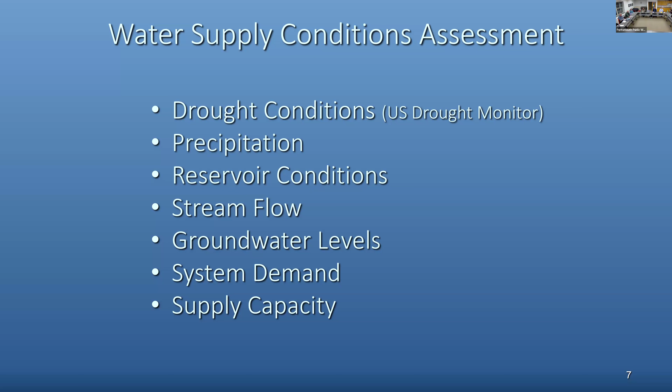We used to incorporate this matrix in our water supply update. It's kind of confusing, so we don't do it anymore, but we are considering all of these factors as sort of a lead up to deciding whether we need to put water use restrictions on based on conditions. So we're monitoring these things, and as all these factors get worse, it may trigger that now we need to put water use restrictions on. Each of the factors, I'll walk through these, we have different categories. Some of them are statistically based, looking at history, where our current levels are, to give them that ranking.

I just wanted to show this graphic. Ultimately, what we end up doing is decide whether we need to put water restrictions on or not. Going through this process routinely, we can start with voluntary restrictions, which isn't usually very effective, but at least it's a red flag to let people know things are getting worse. And then that goes into odd/even watering days, what side of the street you live on, can you water or not, to less frequent watering, to ultimately, like we had in 2016, no outdoor watering.

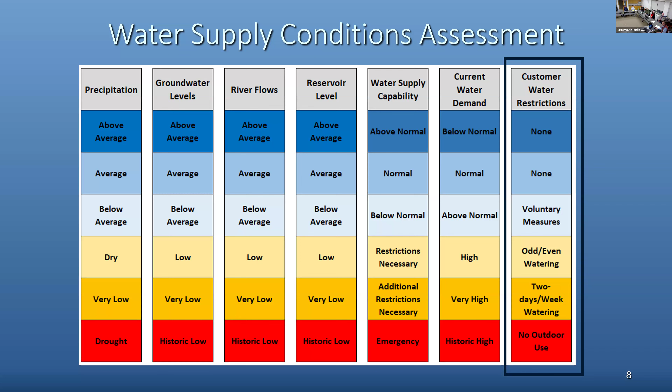So starting with the US Drought Monitor that comes out every Thursday, this is the latest one for the whole country. It's put together by the National Drought Mitigation Center out of Nebraska. They work with NOAA, USDA, and Department of Commerce to put together these maps, and they're looking at similar factors that we use when looking at our conditions. They add some other things like soil moisture and vegetation stress that we don't use. But currently there's a lot of drought across the country, especially Massachusetts is still in extreme drought. This is December 3rd data.

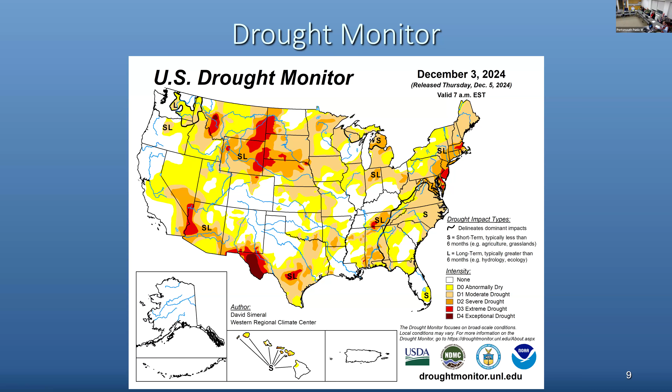This is the current condition in New Hampshire. We are in extreme drought still in this area, moderate drought everywhere else, even with the rain that we received last year. That's primarily one of the factors weighing on this a lot, groundwater levels. Since we were dry for so long, groundwater levels are generally lower, and that's a factor that goes into this consideration.

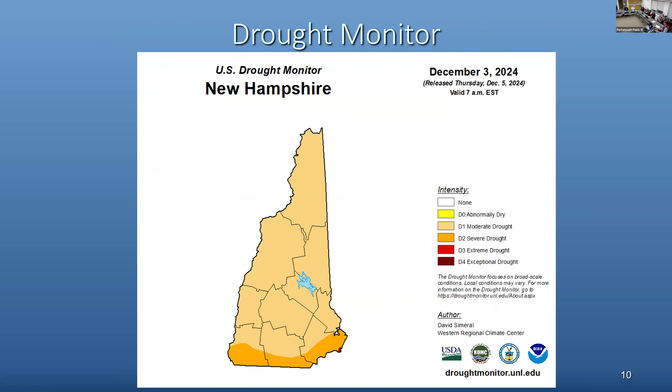So we're now at 83% of the annual average, that's 17% below normal this time of year. I did a quick check, in 2016 this time of year, right before it rained, that extreme drought period, we were 25% below normal, just for reference on how bad we are.

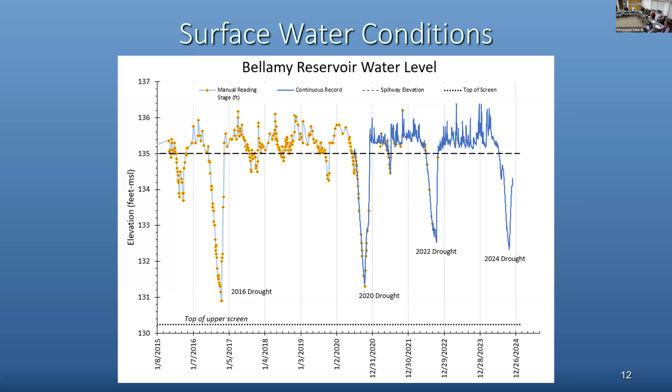Stream flow is an indicator of how much recharge is actually making it to the surface water. We use the gauge in Oyster River since that's a USGS gauged station. It's very similar to the Bellamy Reservoir since they're similar, different sizes, but similar development and general quality.

Groundwater level, it's interesting to see. All of our groundwater levels that I have here, we have transducers in all of our supply wells, so we know what the water levels are in all of our supplies at all times. You pull up on the screen, we have this data.

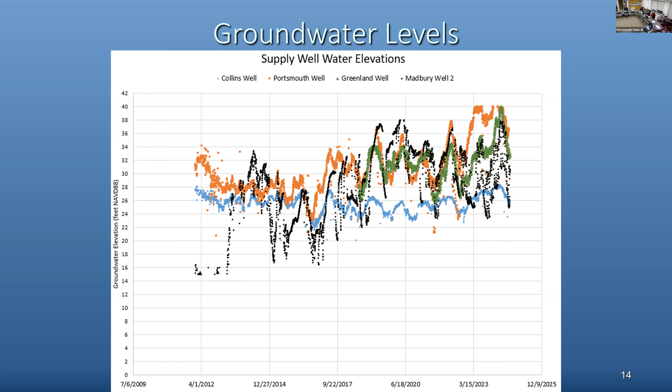Here's just another snapshot of our groundwater levels. This is flipped upside down, so it's depth below the measuring point of each of the wells. This looks at each of the wells. Our Pease wells over here are near average.

The orange lines are 2024 data, October 2024 data. The blue lines are the 9-year averages. So it's pretty close with the Pease wells. Portsmouth and Collins wells are actually higher this year than they have been over the past 9 years at this time. Our Madbury wells, we've been using them quite a bit, so those water levels are a little bit lower than others.

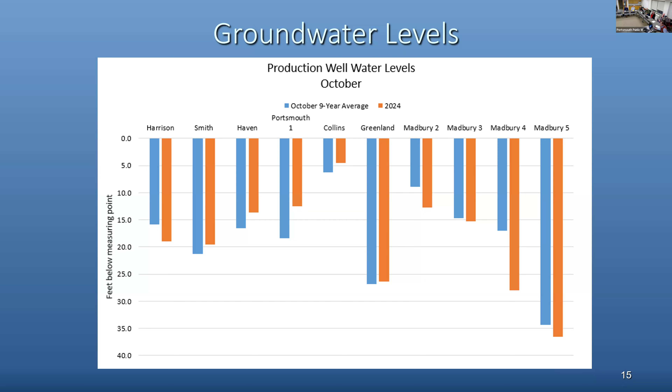That's the natural system, the precipitation, the stream flow, all that side of things. Now we're looking at how much water are we taking out and how much water can we take out to provide. So our source production and our source capacity is how I refer to them.

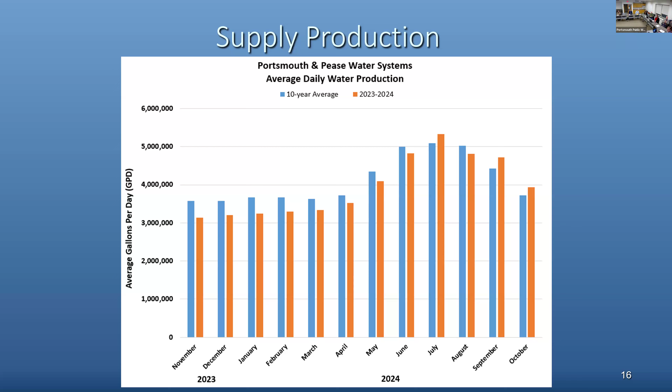And that's not necessarily consistent, specifically with the surface water supply. Summertime, you can't get quite as much water out of the reservoir for a bunch of reasons. One, if the water level is starting to go down, we want to conserve that water. So that factors into what our real capacity is. And water quality conditions at the reservoir may make us take less water from the reservoir.

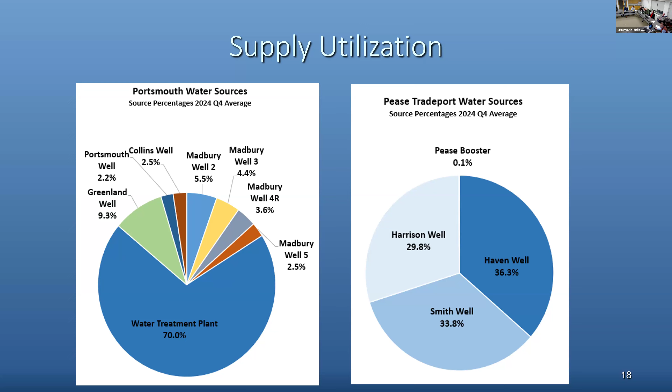Great point. That's something I've looked at recently now that I'm able to view it in that lens. It's good that we have this capacity now, but risks come up—if we lost a source, would we still be able to supply the amount needed with this much growth? Typically that would happen in summertime when there's a lot of irrigation, and there would be a need for more restriction on irrigation to meet those demands. We don't want to have to get there, but that's the give and take that could happen in the future. That said, there definitely needs to be a more proactive approach—figuring out how much can be built safely with what we have.

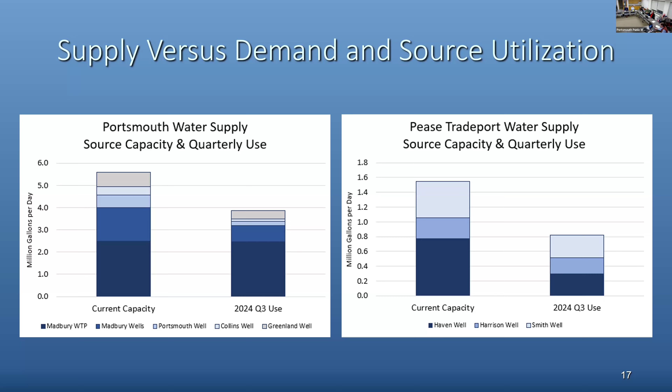There's the kind of development happening now in water redevelopment. Over the past years there's been more development, but it hasn't really shown in our demands because those types of developments don't use much water—they don't have the irrigation, which is the big draw. Smaller apartment-type developments don't use that much water. But it would be an interesting exercise to go through that process and figure out, based on average demand for a building like that, how much we could do.

That issue has actually come up in the legislature, less around water issues and more around housing issues. One issue with approving bills that would allow much higher density in certain areas is that higher density requires pumping more water into those areas and having more sewer capacity. There are places in Nashua, for example, that are already strained to the maximum. People would love to build higher density housing there—there's a ton of demand for it—but the infrastructure at this point doesn't support it. So you have to have a lot of this stuff coming together.

It's one of the reasons why, up there, I know a lot of people look at how we vote on some of the housing bills and it looks schizophrenic from a distance sometimes. But one of the things we have to consider is that if we create a one-size-fits-all bill in Concord, that one size applies not only to Portsmouth, which may have the capacity to support higher density housing, but also to a place like Nashua where they don't have the capacity. So those are some of the things involved. It's an interesting process, because if a new development is proposed in an area, you need to look at the infrastructure and consider it—you can build this, but you need to upgrade the lines so you can get the water. It has to go hand in hand.

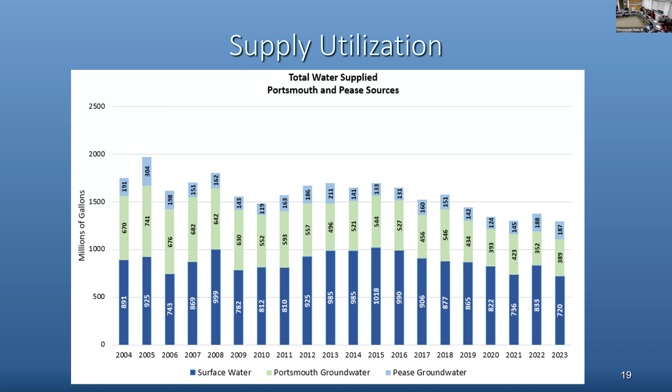Let's move on to discussion.

Projects update. I'm not going to go through detail on all these projects we're working on, I'll breeze through them, but I'm open to questions if any of them you want to know more about.

Lafayette Tank storage and pressure study: this was a study to see if there was anything we could immediately do to improve pressures in the southern Lafayette Road area, as well as what we needed to do for the Lafayette storage tank to improve quality. That study is nearly complete. I just sent the report to the state.

We had a $50,000 planning grant from the state, so they're part of the review process. We've already implemented one recommendation: installing a mixer in the Lafayette tank, a 7.5 million gallon tank, very large. Over the summer the chlorine residual in that tank decreases, which isn't good, so by adding a mixer we're able to keep the residual up. That was a good outcome.

There are more follow-ups from that study to come, and we're getting an amendment to look at the Spinney Road tank and the Newington booster tank to help prioritize the work needed there. They all need repairs in some places and resurfacing, and we need a timeline for when all that work will be done.

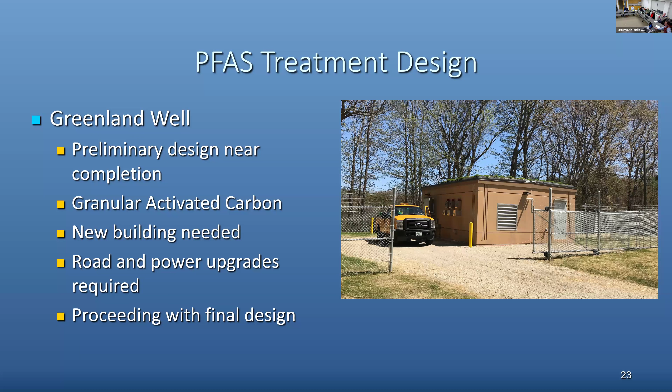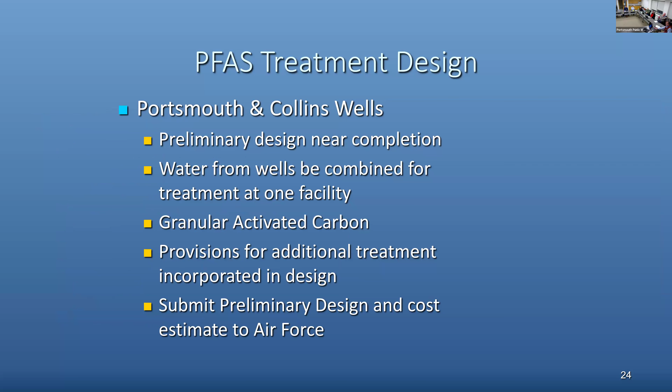Portsmouth Collins, the things we know about is it's also going to be granular activated carbon there because of the fairly low concentrations of PFAS, so we don't need to go with the ion exchange media. Both the Collins Well and the Portsmouth Well are going to be piped to the same facility to reduce cost. That's it for me. Any questions about the projects?

I know in the RAB discussions, we talked about originally the treatment for PFAS from the water supply would get destroyed if it were incinerated, and then that didn't seem to be a completely 100% possible outcome, so it was just being landfilled. Is there an update on what's happening to the spent PFAS or the recovered PFAS?

Going to a Class C hazardous waste landfill. That's where the residuals go, yeah. The granular activated carbon is reactivated, so we're in a rotation with Calgon, they take it back, they reactivate it, and we keep our same carbon. We're not getting anybody else's carbon. We get our carbon back, they reactivate it, send it back. When we get it back, we do tests to make sure it doesn't have PFAS or arsenic or any other chemicals in it.

So, is there no technical advancement to actually destroy PFAS that you're hearing about? There's a lot. At the RAB next week, we're actually having a presentation from the Air Force on PFAS destruction, so this is good timing. Yep, there has been a lot of technology developing. It's just the devil is in the details, right? Are you truly destroying all the PFAS? We're going to hear about some of that next week, actually.

The resulting byproduct of that, in terms of, correct, we don't know what the health effects of those are after you do that to the PFAS, what's left and what does that mean.

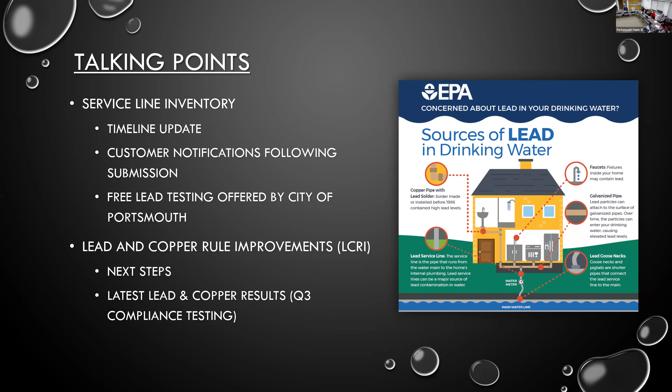So yeah, the first date should be October 16th. It's burned into my brain, but somehow the 7th slipped in. We submitted the service line inventory on the 16th of October, which included all domestic water service lines, but fire and irrigation as well.

Immediately after submittal, we had to send notification letters to all of our customers that had unknown materials for their service lines and galvanized lines. We know we don't have any lead components or service lines throughout our system so far, but in total, out of all of our unknowns and galvanized lines, it was 3,100 letters with my name and number plastered all over.

So the next step, and this is still ongoing, is a very heavy influx of calls and emails following these letters. It was a heavy duty amount of information and people were very concerned just seeing the word lead plastered everywhere, reasonably so. And with those letters, we were prompting the free lead testing, which a lot of people wanted to do.

137 kits have been distributed so far with Mariah's help with that, and we have about 20 more that we're currently compiling and will send out by next week. We're in the works of trying to receive state funding for additional efforts with this inventory process, with handling all of these unknowns, but also service line replacements for the galvanized service line owners.

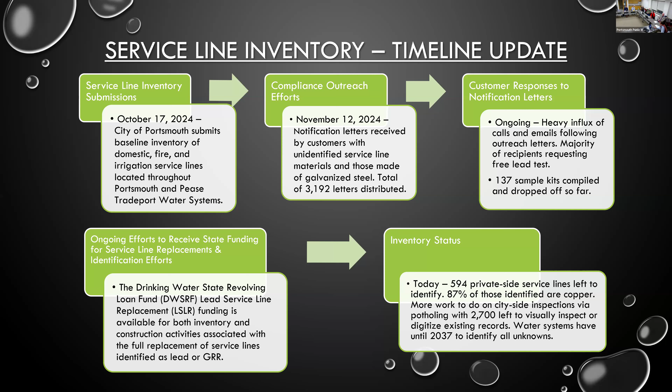Following the inventory submission, we had 30 days to push out all of these letters, based on the EPA and DES regulations. So we decided to take their guidance documents and split it up into 3 different letters that we were going to send out to people. The first one being to those with galvanized steel lines. We knew of about 135 of these lines at the time, which included the action to replace the line. The second letter was for unknowns on the city-owned portion, and you can see the numbers of how many letters were distributed for each one. And then another letter for those with privately owned portions that had yet to be identified, which was 592 at the time.

With that, it suggests, and we hope, that people give us a call so that we can schedule a time for a water meter crew member to go out and inspect that portion of the line. It's much easier to inspect private side services, just because it's a matter of going into your basement where the water meter is located, seeing that line and doing a scratch test on it to see what type of material that is.

Ask questions, or do we wait till the end? You can ask that. That's fine.

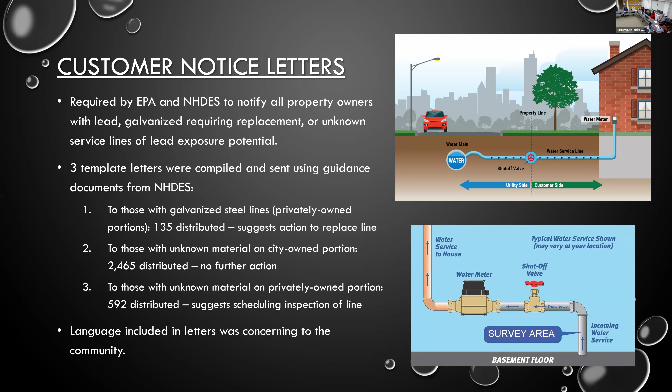So yeah, just a little bit more about the letters. People were very concerned when they first received these letters. I think people weren't reading it all the way through to begin with, but some of the information included, and I can pass these around to show exactly what the letters look like, all three of them are there. Health effects of lead, what you can do to reduce the exposure of lead, testing your water, and different opportunities. One opportunity being identifying your service line material, which is prompted for private side inspections, or the notice of future potholing efforts and why you should replace galvanized service lines and next steps to do so. All that information, very concerning.

But what isn't included in the letters, and that they weren't seeing up front, is that we have yet to identify a lead component or service line throughout both systems. We've identified over 7,700 privately owned services, and out of the 8,400 connections, 87% are copper. The others are either HDPE, high density plastic, or ductile iron, or galvanized.

There are existing records that have not yet been digitized. I already spoke to this a little bit, and these had to be listed as unknowns. If one portion of the line was unknown, then the whole thing was unknown in the inventory.

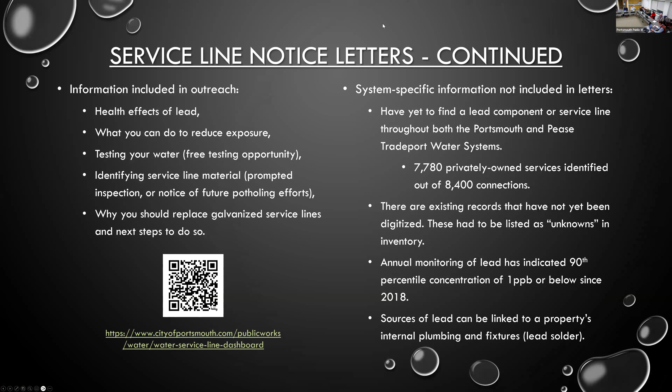Yeah, so it's a little difficult on your phone. It's better on a desktop computer, but it's an interactive map where you can go in the upper right-hand portion of the map where the search icon is. Type in your address, and it'll go straight to the point of your address where you can click on that dot and see what the private side portion is identified as or the city side.

Online registry. Okay, we could. There you go. Anyone daring enough to provide their address for us? Sure, yeah, 75 Aldrich. Okay. You gotta get up to the top right, scroll up. Yep, you got it. Can you search by a specific address? You just have to find it on the map. Or can you type it in? You can do both. Okay, yeah, either way, yep. So you wanna type in 75 Aldrich? No, it's CH, Aldrich, ICH. Yep.

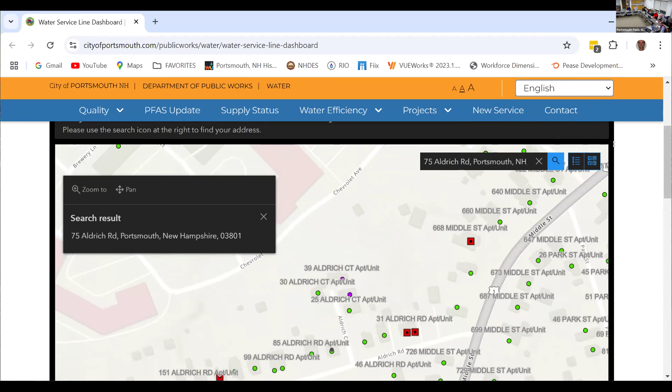Okay, so you can hit the zoom-to button in the top left there, right above your search result on the left-hand side of the map. Yep, zoom to. Because it's a little difficult. Oh, there you go, there you go. So it brings you right to the address. You can click on it, and in the upper left-hand corner, the system-owned portion is non-lead, and the customer-owned portion is non-lead copper, specifically copper. So you're all set.

Except for that one fixture I had. Except for your third floor bathroom.

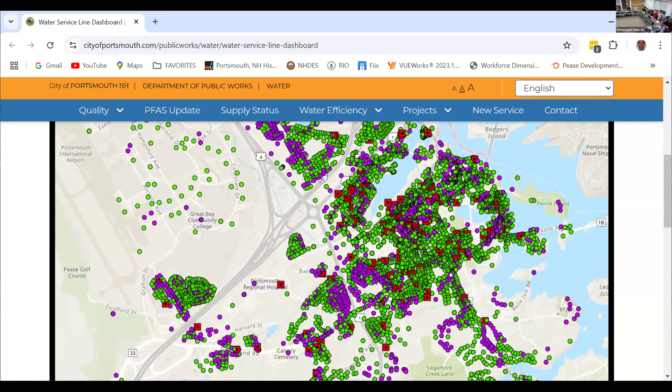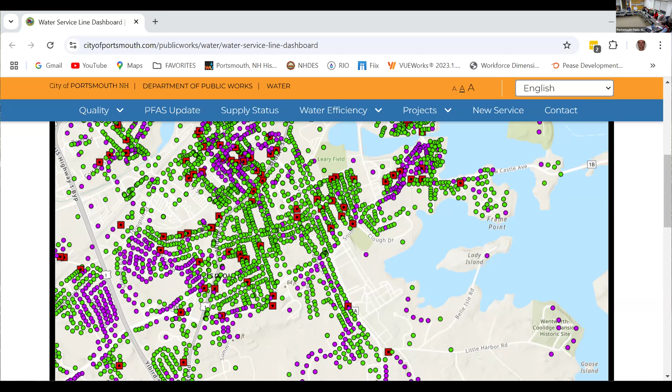So yeah, we can go back to the slides, but I just thought I'd point that out because it is very helpful for people to understand, right down to where they're living, and alleviate a little bit more concern. Are you seeing clusters in certain neighborhoods? Does that matter? No, not quite. I think, like I said, the majority of our unknowns are on the city side right now, and that's difficult to kind of explain to people that it's a combination of different factors as to why that is.

Now it's because of how much work we've done out in the distribution system with replacing water mains. If we were to ever come across a galvanized portion on our side, it's immediately replaced. And so typically what you have is that private side portions are left the way they are because we are notifying the customer and the homeowner at that point that we highly suggest they replace their portion now. But if they don't have the money to do it, or don't take us seriously, they just say I'm going to leave it the way it is. So all of these galvanized services that we found are on the private side, and we know that our side is not the case with those galvanized services.

When you just look at the map, without clicking on individual addresses, there were different colored dots. Is green non-lead and red lead? Completely identified is green, purple is unknown, and red squares are galvanized. Yep, and that's indicated in there too. There's some stats below at the bottom of the map. You can go to the next slide.

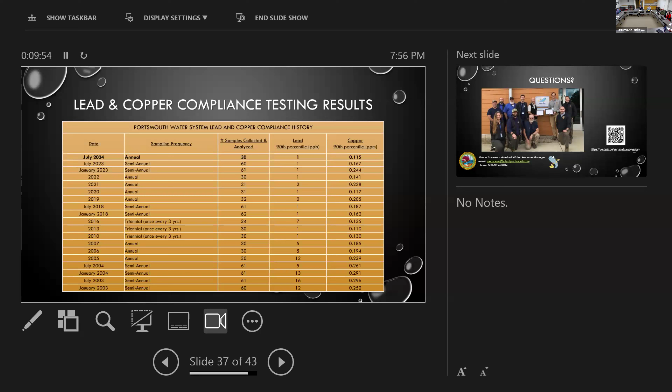The 90th percentile is 90% of the sample pool being at or below that concentration. So 1 part per billion in the past 5 to 6 years.

That's super helpful. The filters that you're going to give, or that you could give to people once they change out the galvanized lines, how long would someone need to filter their water after it was changed out?

Yeah, so that's a good question. Through the regulation, we have to provide pitcher filters for at least 6 months following that. That doesn't necessarily mean that you're going to have this potential of lead leaching into your water. That disturbance is pretty quick and you can flush it out over time.

And that's something that's recommended. When you change out your service line, definitely flush your water with cold water only for a good period of time. What's a good period of time?

Yeah, it varies, depending on your property, how large it is, how many fixtures and things you have within your home. I'd say about 15 to 20 minutes, with everything wide open, basically.

Yeah, so we are offering sampling with that too. If we expect a galvanized line to be changed out, we hand them a letter notifying them of all these potentials, what they can do to minimize those risks, but also offering lead testing at that point in time.

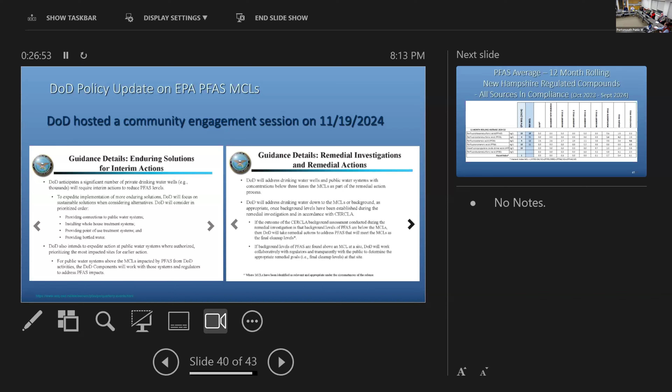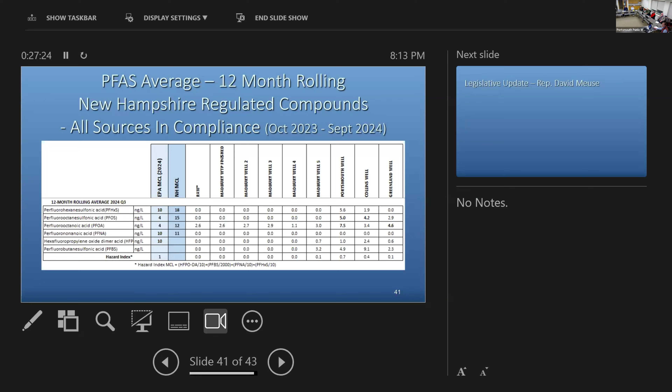All right, I'll pass it over to David.

Okay, well, so we completed the 2024 legislative year in June, and the governor finally got around to deciding which bills he was going to sign and not sign by the end of October. I guess the good news is about 40% of the bills put forward last year were actually passed by the House and Senate and signed into law. There were some fairly significant ones.

Kind of along the lines of what we were talking about with lead testing, there's now a requirement that people selling property with known PFAS groundwater contamination must notify potential buyers of that contamination. That's something we've been fighting for. I actually had a bill a couple of years ago that would have done something like that, so this has been something we've been trying to do for a few years, and it's finally gotten passed.

Another one is much broader recognition of the cyanobacteria problem with the lakes. I think when it actually started affecting Lake Winnipesaukee this year, it was a real wake-up call for a lot of people in New Hampshire. So there was a bill that puts control of the cyanobacteria under the control of the New Hampshire Clean Lakes program.